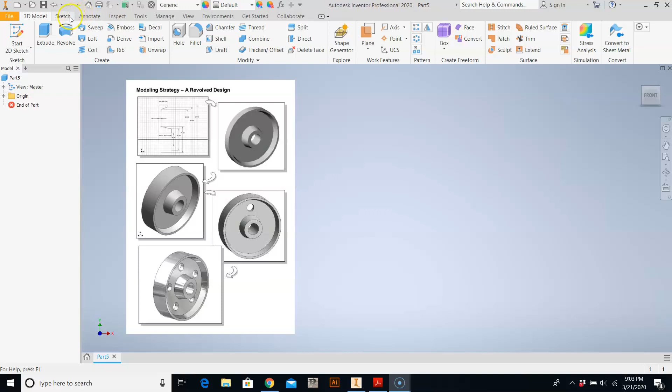Alright, so we're going to get started in Chapter 11, looking at the symmetrical feature options, mirror, patterns, and things like that. They're going to make our drawing time just a little bit quicker when we're looking at parts that have symmetrical features associated with them. So let's go ahead and get started.

I'm going to just run through the way the book goes over this problem, and then I'll show you a couple little tips at the end, things that I do just a little bit different.

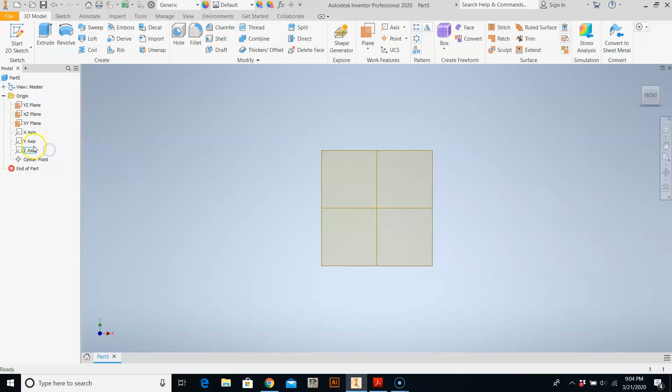So what I'm going to do is go ahead and click on all of the work planes, right click and change the visibility and have those on, and I'm going to create my first sketch on the XY plane. So I'm just going to create a new sketch on that particular plane and get started.

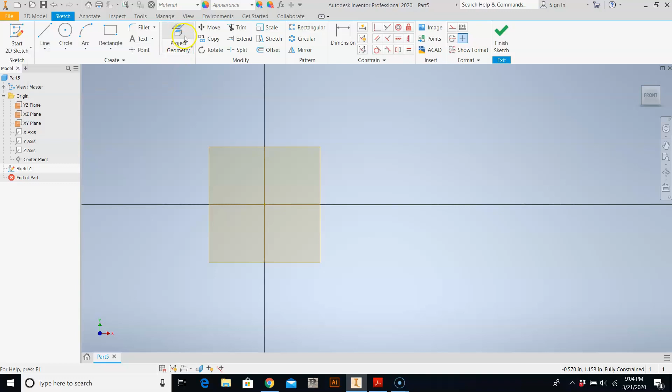So the very first thing I want to do is use this project geometry. This is setting this up just a little bit different than how you've used project geometry before. What we're going to be doing now is clicking on this so we can use the geometry we're getting ready to sketch, and use what's called a linear diameter that's going to allow us to place the dimensions and keep with the whole diameter, not just the radius.

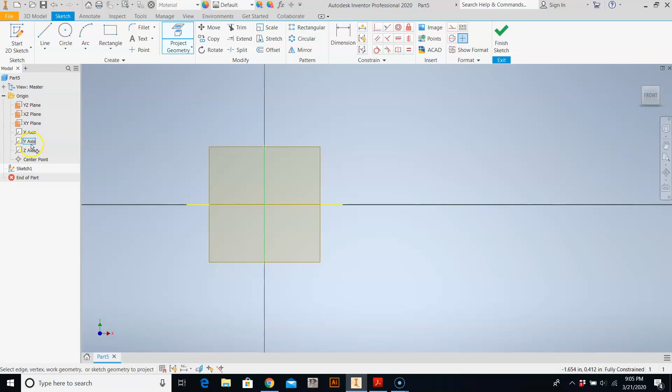So what I'm going to do now is click on the x-axis, which is our horizontal, and also our y-axis, which is vertical. So I've got that set up, and now we're going to start just drawing a basic sketch of that geometry that is there.

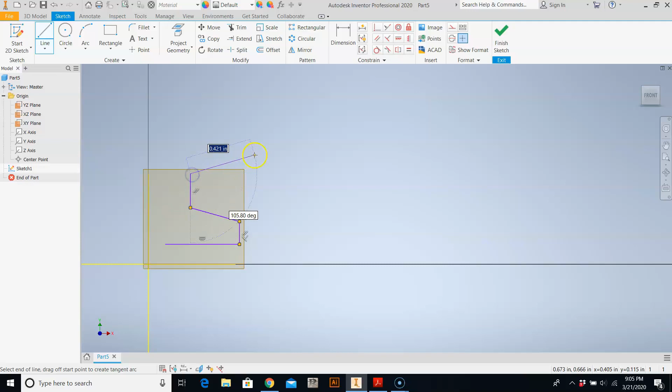I'm just going to sketch that out. Oh, I should have made that even, but I'll go back and fix that. Alright, so I'm just kind of sketching this out here, and I can go back now and apply the dimensions.

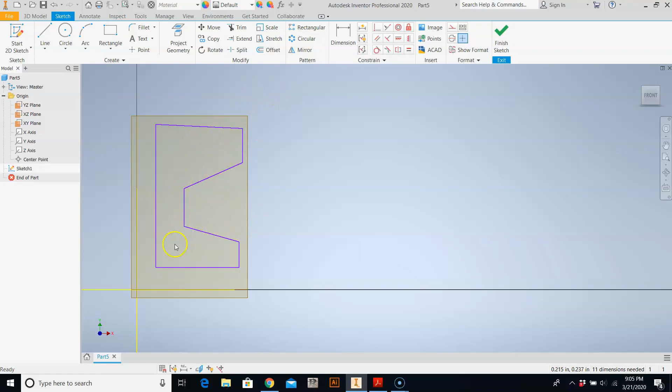So when I apply these dimensions, we've got to really think in terms of what we're getting ready to do. We're getting ready to take half of this feature here and revolve it around the y-axis to create a 360-degree profile of this geometry right here.

The second step to this is going to be mirror. We're going to mirror that around this axis right here, so I'm going to bring that back over. So I should have picked this line right here when I was dimensioning.

I should have put that at 0. And this line up here also needs to be horizontal, so I should click on that and make that horizontal for this part. So I'm going to now start applying some of the dimensions.

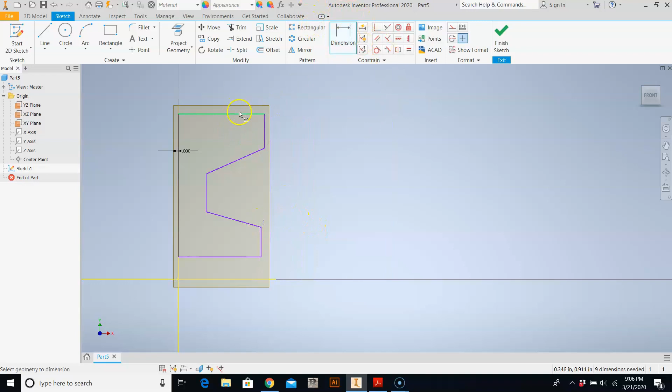When I apply the dimensions, I'm going to be using the y-axis as the center point of this part. So when I click on dimension, I am going to want to right click when I'm done selecting. I want to right click at this point.

So I pick this line here and then pick this line, and then the third thing I'm going to do is right click in order to get this pop up. So what I want to do is select linear diameter, and the linear diameter—

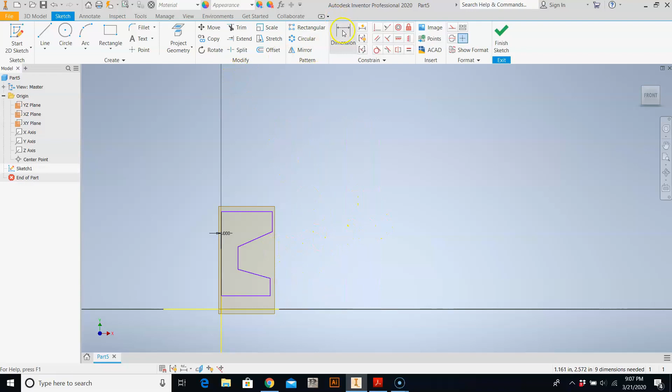I should not have done that. Let me go back and try that one more time. I'm going to pick the axis first, that point, and then right click linear diameter.

There we go. And I'm going to type in 4. That is, alright, click on it there. Let me drop that there and then type in 4 for the diameter.

And I'm just going to use the dimensions that are given to me in the textbook on page 11-9. Just want to also make sure you know this place, this point right here, the horizontal line and the distance between the x-axis, this is acting as the hole that is in the part.

So this dimension does need to be open. This x-axis is going to be the point in which we're revolving this profile around. So make sure that when you place this dimension, that we're placing the dimension as a linear diameter, and we have this set up as 0.75. So 0.75 is the diameter.

So if you went back and measured this, the distance now between this line here and the axis should be 0.375, and that is what it is.

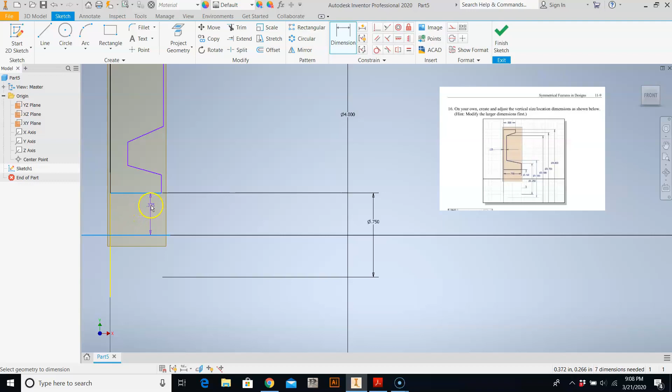So we're using the linear diameter command. This should help you with your values and keeping straight with the diameters. Sometimes people get a little confused on this and they actually enter the diameter as the radius, and then you end up with a part that is twice as big as it should be.

So I'm going to go back now and just work through placing these dimensions on all of the other points, and I'm going to start with my axis first and then the point. Right click and then place the dimension.

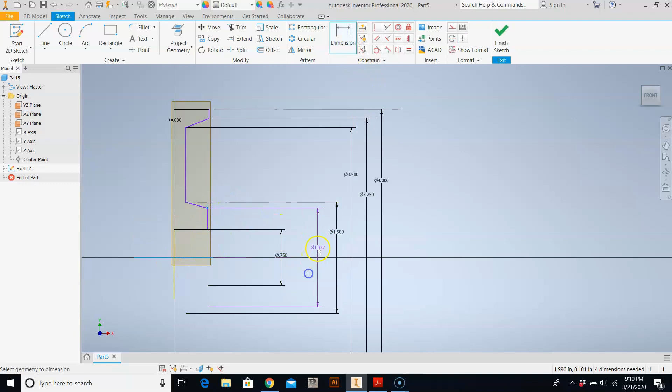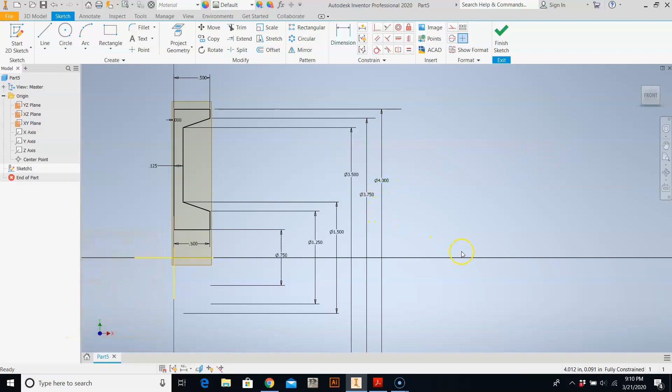Alright, so I now have all of the dimensions that I need in order to revolve this part. So I'm going to finish the sketch, and this is going to be the first time that you've ever used the revolve command. So what we're going to be doing here is picking the profile and then specifying the axis in which we want to revolve it.

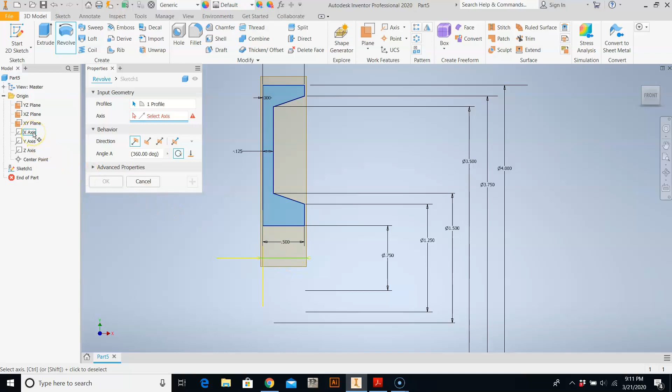So I'm going to click on revolve, and because I only have one profile there available, that is going to automatically select. So here is the profile. The second thing it's asking for right now is for us to select the axis, and we're going to be using the x-axis. You can select that here, or you can select it over in your model browser. So when I click on the axis, you'll see this is automatically doing 360 degrees.

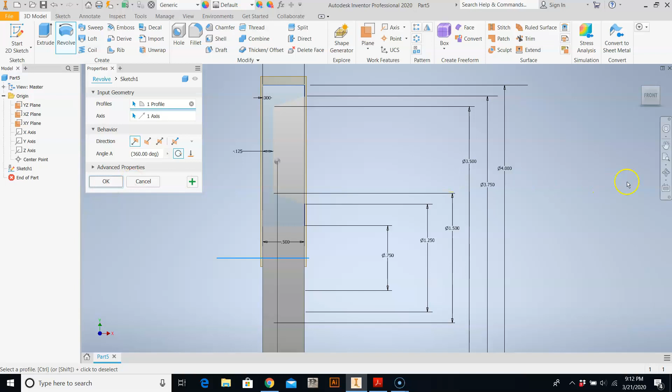If you don't want 360 degrees, you can modify that. You can see here the direction in which it's being rotated. These are all things that you should be familiar with now, the directions for this revolve. So if it were less than 360, we may need to make a choice which way we wanted that to revolve. So I'm going to just turn this, not that way. I wanted to rotate it to the side just a little bit so you can see what we've got here. And that is going to revolve.

So we've got the start of this part here, and now we're going to look at moving on to the mirror feature. I would say probably the hardest thing about the mirror feature is actually finding where that mirror feature command is located. So we're under the 3D model, and if you look all the way over to the right under pattern, here is your mirror feature. That is probably the most difficult thing about the whole command, is being able to actually find it.

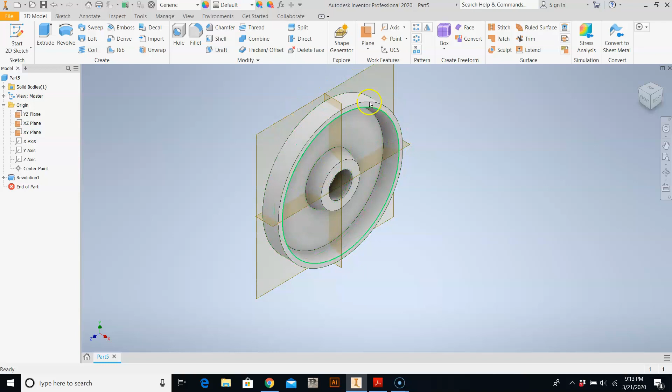But once you've used it one or two times, you won't forget the impact that has. It saves you a lot of time for drawing, and it doesn't have to be just a part that's round shaped like this. This can be any time that you have a part that's symmetrical, and you'll find it's a lot easier just to draw half of it or a quarter of it and use the mirror.

So what we're going to do is pick on the mirror, and I'm going to actually pick on the feature. The feature that's being mirrored is this entire part itself. I can pick the feature here on the actual part, or click over here where it said revolve.

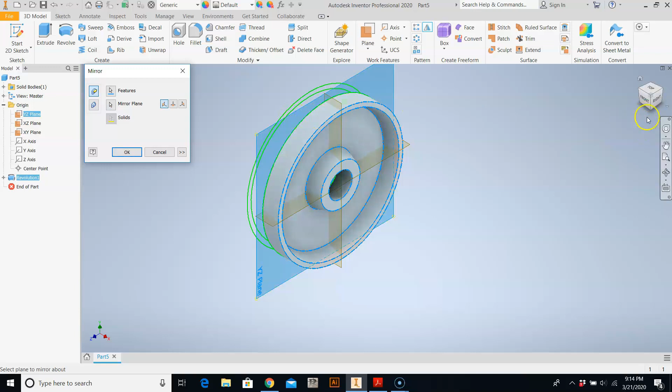The next thing I'm going to do is click on the mirror plane. If you remember back on our mirror plane, we want this axis right here, the YZ plane. That's actually our mirror plane, and we're going to be using that to mirror this part. So if you look at that from the side, we're using that plane as a mirror point.

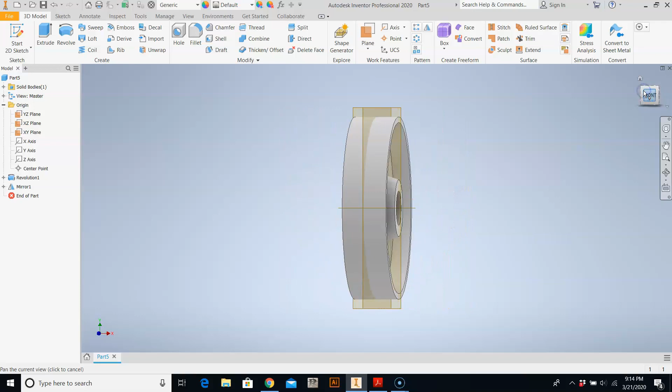So I'm going to hit the OK button, and there we go. We duplicated that part in just a matter of a few minutes there, and now this part is symmetrical and it is mirrored. Anything that's changed in this revolution right here would then be updated in the actual mirror itself.